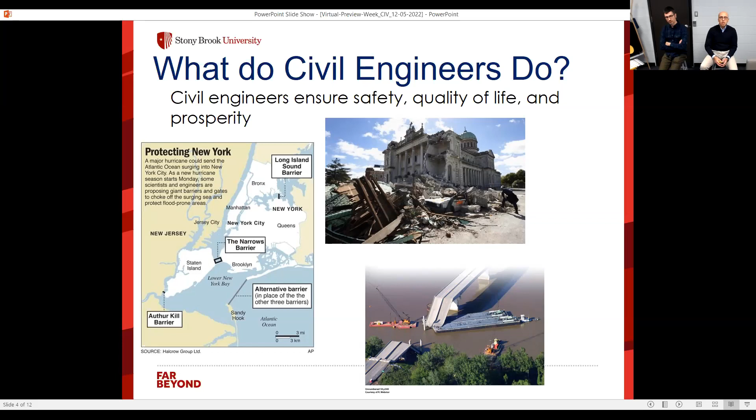So if we think about that future, there has been a study that has identified 6 trends that will change the future. Among those that resulted out of this analysis: alternative energy, autonomous vehicles, climate change, smart cities, high technology construction and advanced materials, and policy and funding as the 6 big items that will define the future of our cities and our civil infrastructure.

I would argue that in all of those, civil engineers will play a crucial role. In alternative energy, from the design, operation, optimization of wind turbines, for example, or marine turbines; in autonomous vehicles, the development of new roads, as well as new information systems and data analysis to control these vehicles.

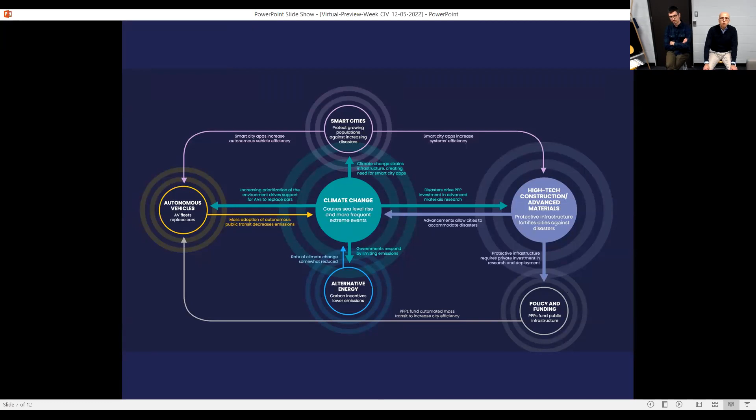Towards the 2030s, we may start to see the development of rural cities, cities that people may not necessarily want to live in as high dense urban areas, but they need to still be connected by high-speed transportation systems, the internet. They may work remotely.

We may foresee the possibility that if climate change continues to lead to the increase in sea levels, we may consider the possibility of dealing with floating cities and how that future might lie, and the use of AI, artificial intelligence, may become prevalent. If our environment changes, we may want to explore or have the need to explore the development of frozen cities or environments in extreme conditions.

And of course, towards 2060 and 2070, 50 years from now, the challenges and opportunities of developing dwellings and habitat conditions beyond Earth. This future, even though right now it seems very stretched out and very futuristic, is happening right now. This is 50 years.

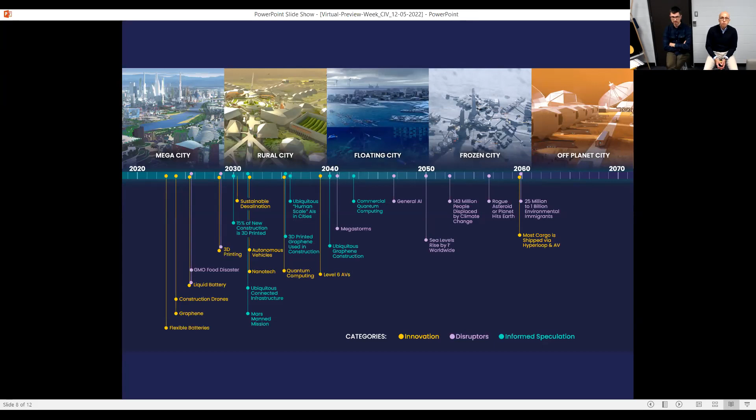And if you think about it, right now, civil engineers are designing infrastructure that is supposed to last 50 years or even more, 100 years. Are we going to get it right? Are we going to do the right things for the needs of the future? So in some ways, the future is now.

So there are many exciting opportunities. And even though these are very futuristic ideas, we would like to share with you some of the things that are happening right now at Stony Brook University to make that future happen.

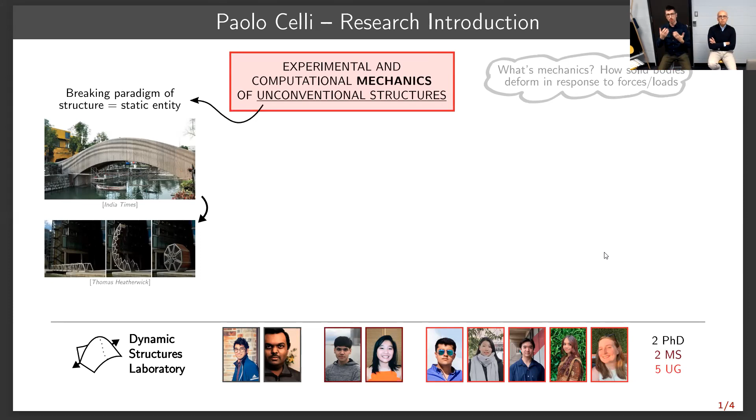Okay, perfect. So usually when you think of a structure, when you think of a bridge, for example, of the two images on the left, you probably think about the first, something that is static, built to last, not to change. But when I think of a bridge, I think more of the second option at the bottom, which is a prototype of a deployable bridge, something that can be fabricated to be very compact and wheel-like, and then upon utilization of some actuators can be deployed into an actual bridge.

So some deployable system, something capable of shape changes - this is what I'm interested in. I do a lot of work in shape-changing structures, and to do so, I really try to come up with creative designs that feature arrangements of structural elements, even basic structural elements, but arranged in a way such that in concert, they produce some desired, very interesting functionality.

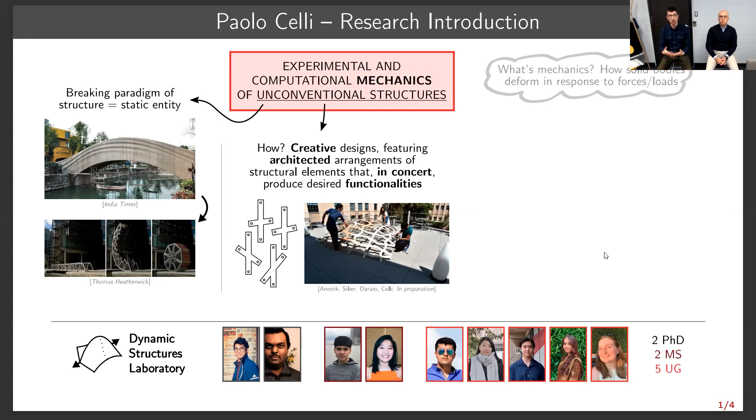For example, what you see at the center of the screen is an assembly of cross-like structural elements that is fabricated to be flat, and then upon actuation can be popped up into a three-dimensional dome-like structure, as you can see in these images.

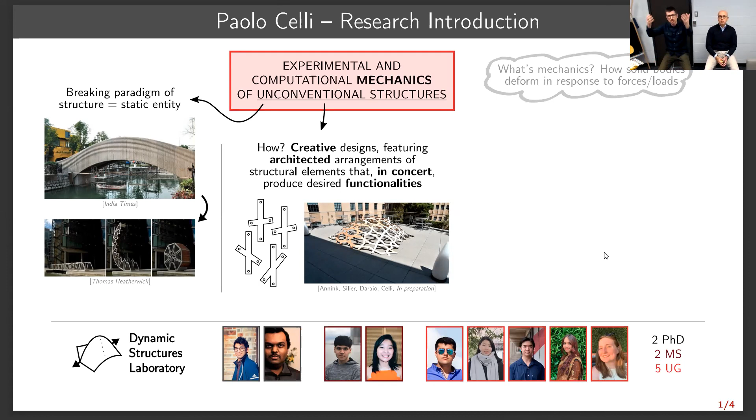And most of the research that my group does - by the way, you can see that structure over here, this is a small-scale prototype of what you see there, which is a few meters by a few meters, and this is just a small-scale prototype. Upon the application of a pulling load at the boundary, you can pop up this initially flat structure into a dome. And this is quite a novel concept that can provide an improvement on some of the lightweight structures currently used for stadiums, pavilions, and so on.

But among the things that I do, pop-up structures is really a big thing. I try to design new and interesting structural elements. I deal with structures that are multi-stable structures.

For spacecraft. But in our case, we're trying to use similar types of structures, for example, to create coilable turbine blades for wind energy purposes, that can be transported in a compact configuration and then deployed on site. And finally, a thing I'm really working on is environmental morphing - trying to leverage the environment, changes in temperature, changes in humidity, in order to transform a structure from a certain shape to another shape.

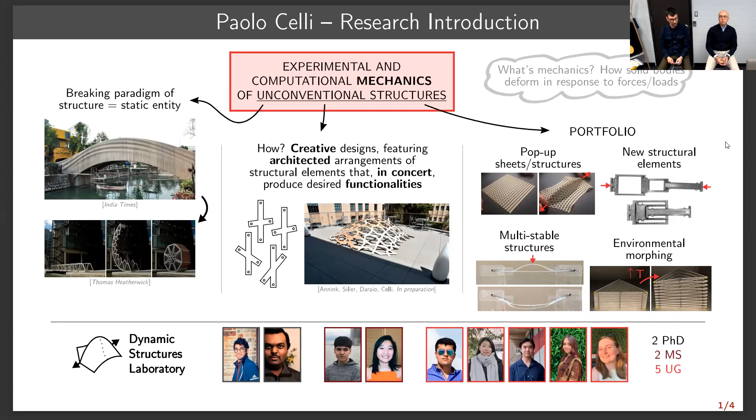Okay, and do I have a little bit more time, or I don't know? Yeah. So basically, as far as shape-changing structures, going a bit more in detail, these are really called deployable structures, and you see them everywhere around you. They're everyday objects, toys, they're making their way, they're very common in aerospace to create, for example, foldable antennas.

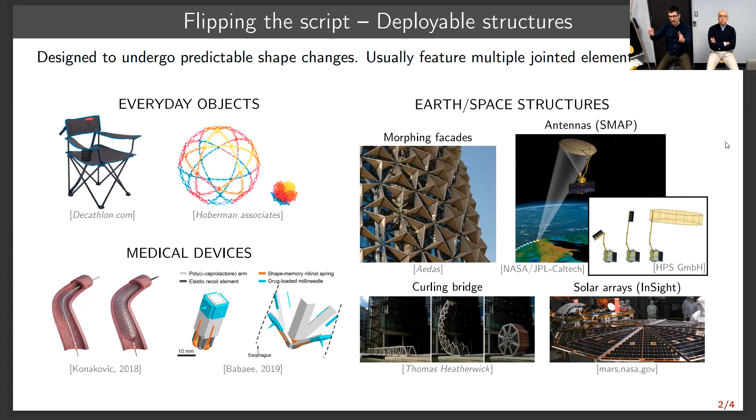And they're making their way also in civil engineering, for example, to create morphing bridges, as I showed you before, morphing facades of buildings that can adapt to environmental conditions to let sun in or not. And another big push, as I told you, is this environmental morphing. My dream would be to create a structure that I can put out there on a dry day, and then due to changes in humidity, it pops up, it self-constructs in a way, into a second popped-up shape.

And stays in that shape no matter what the conditions are afterwards. So these are some of the things that I have in mind and some of the things that I'm working on. Of course, for all these things, the work that me and my students do is very fundamental in nature. So we try to come up with a concept, test it at the tabletop scale, and then see if there is a pathway for their applicability to larger scale applications.

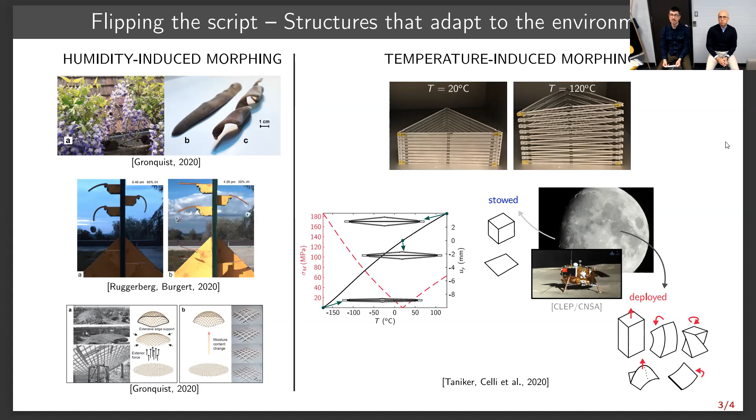So yeah, this is pretty much what I do. I don't know if I ran through it already.

Another example is what Dr. Burgueno is working on, this idea of trying to flip the script in structural engineering. In the past, for example...

And still nowadays, people were really afraid of the idea of buckling. Buckling is when you have a column that under a very large weight buckles, undergoing a very large lateral deformation. Buckling is very dangerous and to be avoided, except that nowadays we're trying to use this idea of buckling, for example, to trap energy.

What you can see there on the right is an example of a structure with an egg on top, and the structure is capable of buckling within it. It can trap some of the energy associated with a free fall type of motion and prevent an egg from breaking, for example.

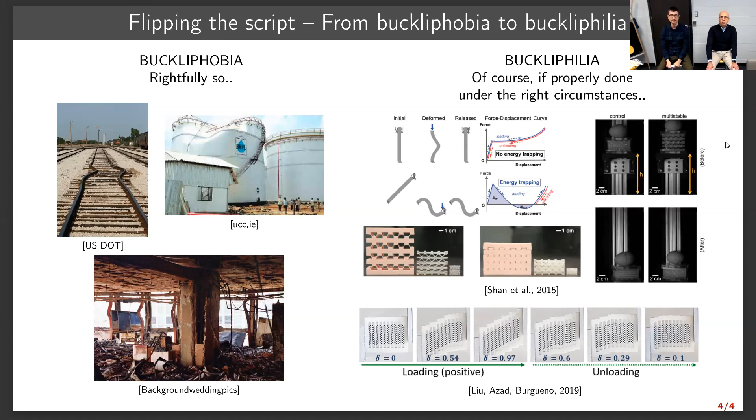Dr. Burgueno is using some of these ideas to create devices that can trap some of the energy associated with earthquakes, so that these devices capture the energy and the structures don't break. This is pretty much what I have.

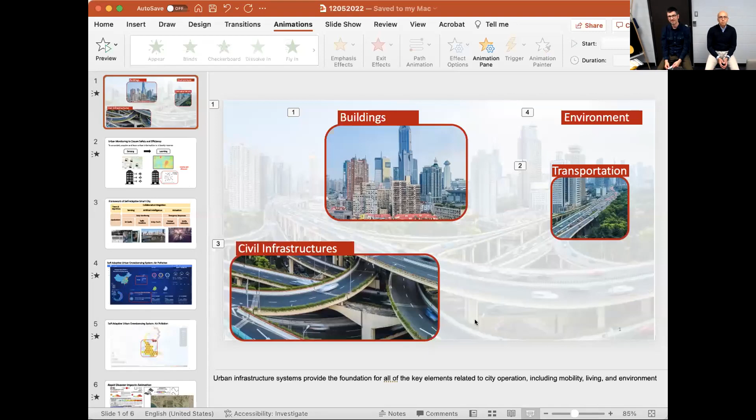Can you see my screen? Yes, okay. Hi everyone, I'm Susu Xu. I'm an assistant professor. My background is actually pretty multidisciplinary.

I have background in both civil engineering and computer science, and the research field I'm working on here at Stony Brook is actually also very interdisciplinary. We especially have a group on civil infrastructure systems, including me, Dr. Anil Yazici, and Dr. Ruwen Qin.

We all work on civil infrastructure systems, combining emerging technologies including autonomous driving, smart mobility, computer vision, and other advanced artificial intelligence technologies, to make our civil infrastructure systems smarter and more efficient, to better serve people's daily life and also emergency response scenarios.

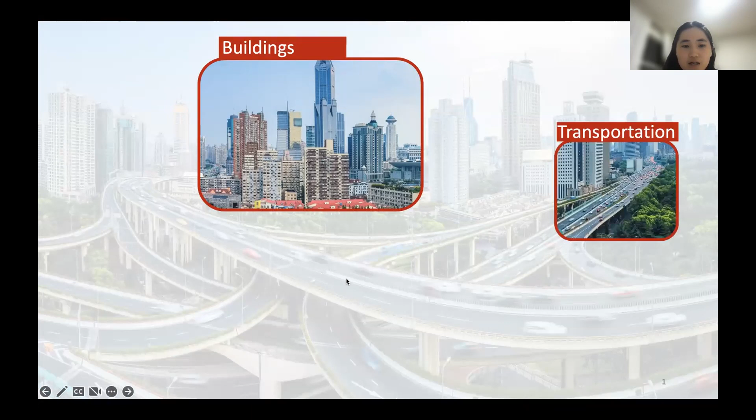Here I show a figure of a typical view of a current city, and you can see that these civil infrastructure systems are actually the foundations of our city, supporting our daily life, our mobility, our living, and our built environment. So you can see some typical civil infrastructure systems like buildings, transportation systems, bridges, and also the environment.

All of these critical infrastructure systems are what we really care about. And the problem is that as we now have more population moving into the cities, we have growing, more complex human mobility, and more challenges like climate change.

All of these challenges result in more complex interactions between civil infrastructure systems and humans, and also the environment. So as civil engineers, we couldn't just design these systems based on our past experiences, but we also need to consider their interactions with this more complex, dynamic environment. That pushes us to the frontiers of leveraging big data in cities and understanding data from humans and from the environment.

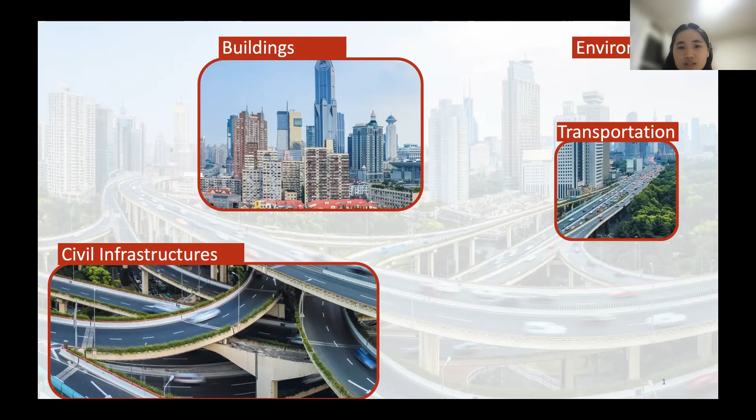To better design, operate, and maintain our civil infrastructure systems, which we now call smart infrastructure systems, some key elements are mainly about sensing and machine learning. So basically now, except for the physical component of civil infrastructure systems, we also start to deploy a lot of sensors on vehicles, buildings, bridges, roads, and traffic lights.

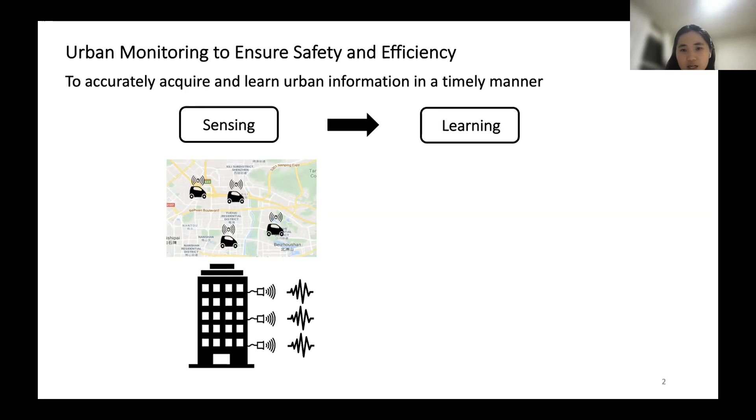Almost every type of infrastructure system you can see is mounted with some type of sensor. In the meantime, we collect real-time data over the entire city about how people are moving, what the status is, how buildings are vibrating, how bridges are vibrating. We collect this information so we can utilize artificial intelligence and machine learning technologies to better understand the dynamics inside the infrastructure system or the entire urban system.

You can understand their conditions, where is the traffic congestion, where is the air pollution, where is the noise, so we can do better maintenance and management of the entire city. So that's basically how, in this smart infrastructure system, we retrieve information from these infrastructures and how we make decisions based on this information.

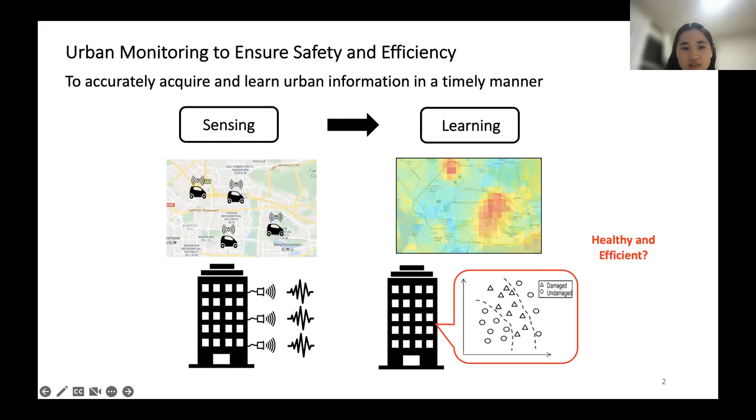And especially, my research is a collaboration or collaborative integration of sensing, artificial intelligence, and actuation technologies.

We develop different theories and algorithms by collaborating with experts from electrical engineering, computer science, and statistics to apply this kind of theory and algorithms to real-world applications such as daily urban monitoring. We can monitor air quality, traffic congestion, bridge health, building health, and emergency response. For example, when disaster comes, or slow changes like climate change occur, how should we improve our infrastructure system to make it resistant or resilient to these dramatic changes?

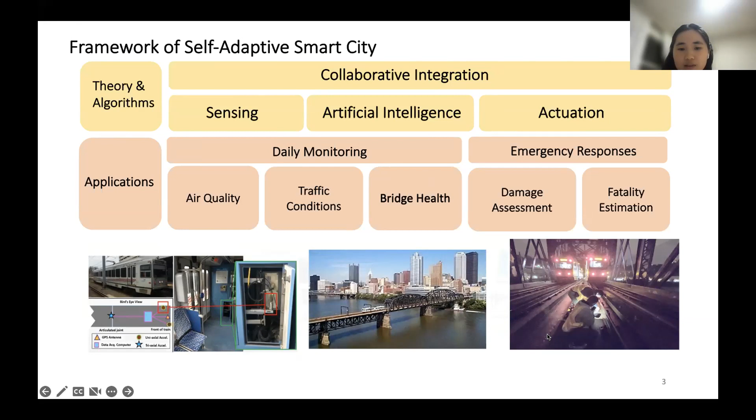So we deploy our systems, and you can see some examples. We deploy them on railways, on bridges, and we keep monitoring the vibes of the cities. Here are some examples we have done. One is environmental sensing.

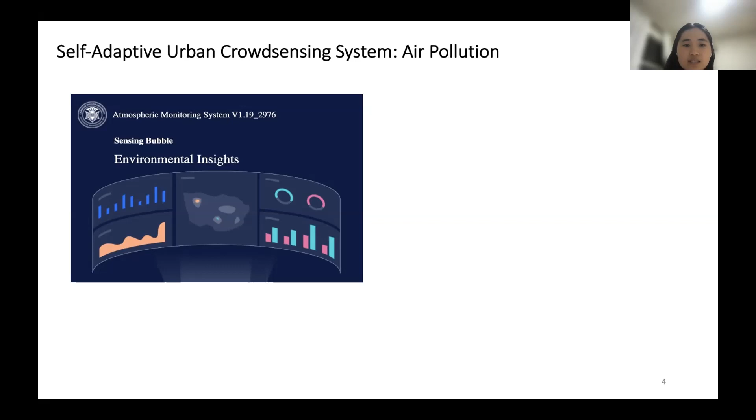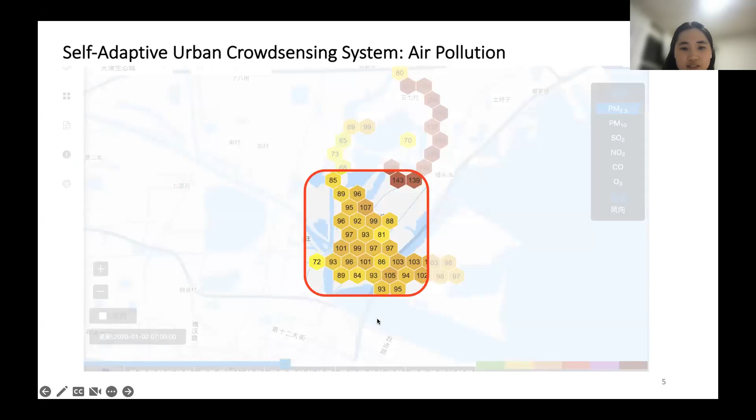We mount a lot of vehicles with air pollution sensors. When they move inside the city, like ride sharing services or taxis, they collect data and share it with us. We can utilize this data to construct a map of air pollution and conduct real-time monitoring. These are some information we collected from these vehicles about air pollution, and if you keep zooming in, you can get a lot of detailed information here.

Another application is rapid disaster response. We work a lot with USGS and NASA on leveraging advanced sensing technology together with remote sensing to better understand, when disaster occurs—for example earthquake, hurricane, flooding, or wildfire—what are their impacts?

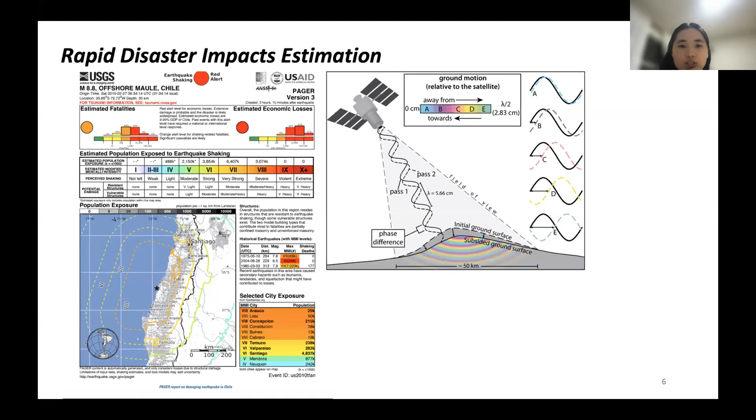How many people die? What about human displacement? How many buildings are damaged? Which roads are blocked? So that we can better utilize this information for efficient disaster response. We utilize information sensed by satellites, optical images or SAR images, to infer where the damage is located, in a near real-time situation. Immediately we know where the damages are and we can better dispatch rescue people to save people there and better do the recovery process.

Now we are also combining data from social media, for example information shared through Twitter, news, Instagram. We crowdsource this information to better understand the situations of humans, where people may be trapped. We utilize this information, extracting it to better organize the recovery process or response process.

From this process, you can see it is a very interdisciplinary field. You need knowledge about critical civil infrastructure systems, knowledge about how people use these infrastructures, and background in computer science so that we can utilize algorithms to help us extract information. That's what we are working on in Stony Brook University Civil Engineering department, especially our group of civil infrastructure systems. We are designing and deploying these advanced technologies to better understand, maintain and manage our civil infrastructure system and have them better serve people's needs.

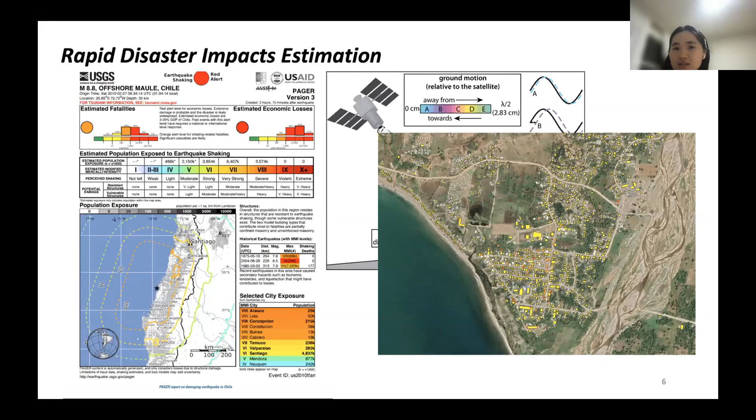Let me come back to this. I'm sorry, my slides are not advancing.

Water quality is one of the biggest problems and biggest achievements of our modern societies—the accessibility of clean water. Yet it continues to be a challenge to make sure we have clean water for everyone. This is a continuing challenge because our way of life is introducing new pollutants and chemicals into the system that we need to identify and remove. But it's something we expect and rely on, that when we turn on the faucet at home, we are going to be safe and the water we consume is going to be safe, without health concerns.